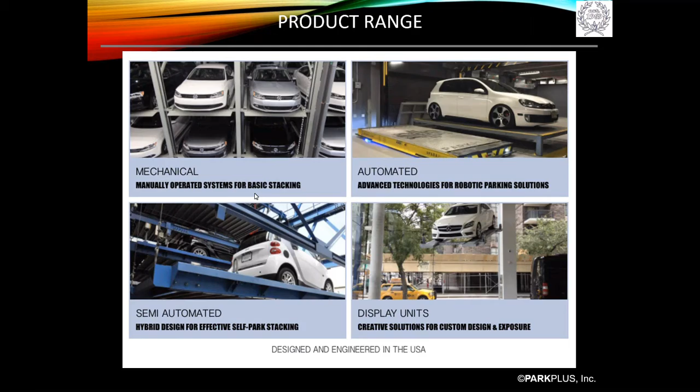So again, real quick, we're going to start getting into the systems. As I mentioned, the systems are going to go from the valet, non-intelligent systems, and as we keep moving forward, it's going to keep getting smarter, more dense, and more user-friendly.

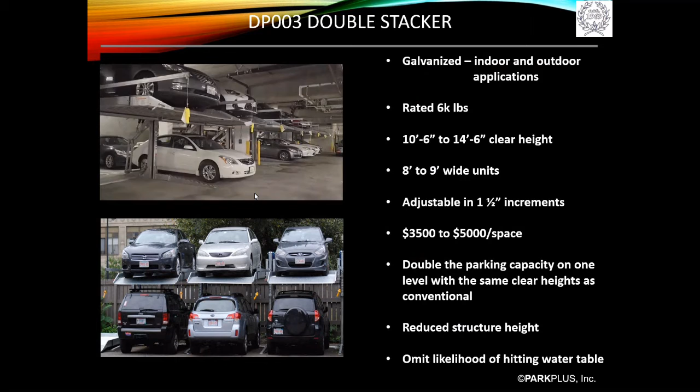So what's being illustrated here is just a stacker. Push a button, it goes up; push a button, it goes down. A very non-intelligent, valet-oriented system, because you have to physically and manually remove the lower level car to capture the upper level car—hence the valet. So you get a one-to-one solution: for every surface space, you get one space above.

This is a hydraulic-driven system. The 8 to 9 foot wide units, 10 foot 6 to 14 foot 6 clear height, rated at 6,000 pounds. Like most, actually all, of our systems are rated at 6,000 pounds.

The convenience of this system is pretty much a shelf item. We stock it, so we have it most of the time readily available. Very low price point, $3,500 to $5,000 per space. So in the picture at the bottom with the 6 spaces, you can say 3,500 times 6 up to 5,000 times 6, and economy of scale very much has an impact on our per space or per unit values.

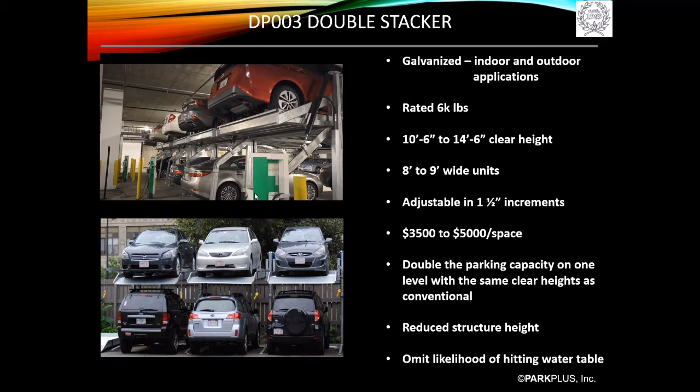The more spaces you do, the lower the incremental per space value is, and the reason is purely economy of scale. It'll take us as much energy to install, design, and get approved through local AHJs like permitting, planning, zoning for 20 spaces as it would for 200 spaces. So that's a case-by-case analysis on price points.

Typically this system, we'll see in the next few systems. This is illustrating a 3-level. These systems we see indoor and outdoor. They are hydraulic systems, so they're very much value engineered to be installed indoor or outdoor. So again, it's a case-by-case, project-by-project analysis.

Here again, you have to manually remove the lower level car to get the car on level 2 and/or level 3, and like on the next one, the 4-level, to get to the 4th level. So again, valet oriented. You have to have attendants, or we strongly recommend attendants for these types of solutions. You're pressing a button to go up, pressing a button to go down.

Very, very easy to operate, very easy to install. We typically have about a 5 to 6 month lead time on these products because the 3 and 4 level is engineered site specific. They are seismically rated if needed. We have ASTM steel if spec'd. So something that, in my opinion, is a differentiator in the market is the different add-ons we can offer to our systems, such as seismically rated, ASTM. We can paint, they come galvanized.

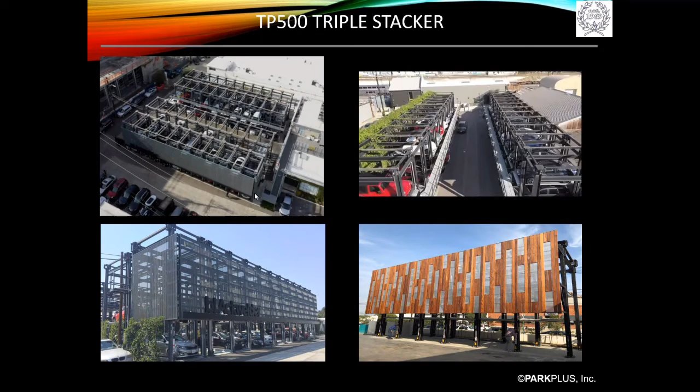This system here has a height of 21 to 26 feet for the 3 level, again hydraulic driven systems. If you notice the property top left, I like to illustrate that. It's actually a 9,350 square foot footprint. We were able to go vertical, 3 levels, and capture 132 spaces. So if you do the math, it's 9,350 divided by 132, that's 71 square feet per space. That gets back to that 86% space savings I was mentioning earlier.

So moving on, and again, if I glaze over something, if you want more detail on any of the solutions, or maybe you didn't hear me properly, just please stop me and ask a lot of questions. I don't mind at all.

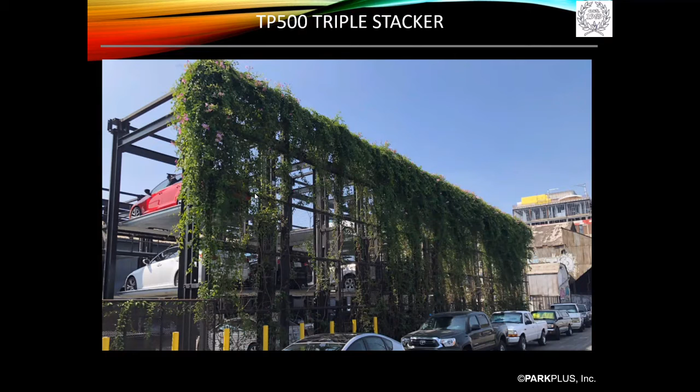Showing skin cladding roof, you can have our superstructure, our steel elements, double as your superstructure and simply hang, secure, weld, pin, or anchor a skin cladding roof to it. What we're finding in some municipalities, like Boston and Miami, is they don't want to see a structural steel skeleton sitting out in the community, so they're requiring a skin clad roof in some areas. It just depends on the local AHJs.

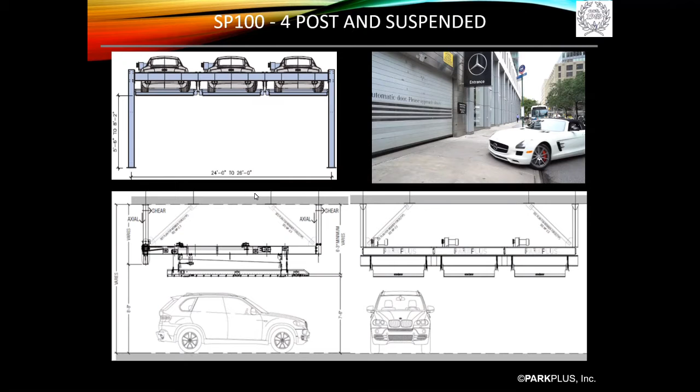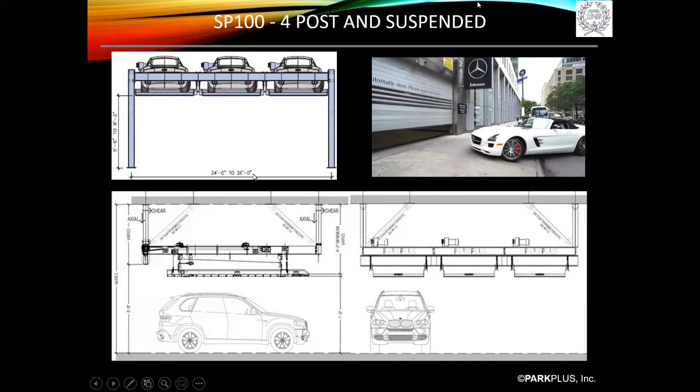Top left, what you're seeing is a 4-post solution. Prior to this, the 3 and 4 level, if you remember, you had a vertical element at each and every bay. Here we're clear spanning, so now the human element, or the idiot factor, is removed, and you're not backing in or pulling into structural elements at every bay. It does give a little bit of ease of operation.

So 4 posts on the top left illustration. The bottom illustration, what you're actually looking at there are 3 spaces. The section view in the PowerPoint, that's actually 3 spaces over the drive aisle.

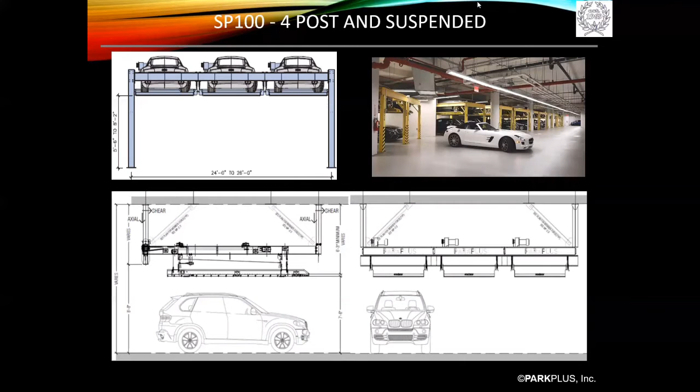So now what was once useless or wasted space over the drive aisle, you can have a lofted space suspended from the slab above, or even do it as a 4-post over the drive aisle and integrate spaces. You can do 2, maybe even 3 spaces, depending on the width of the drive aisle. So now you're talking about every 20 feet, getting an additional 2 to 3 cars in the drive aisle.

So the right shows one section view, and then the left illustration is another section view looking at a different angle. So it's suspended from the slab above.

With this illustration, you could actually omit these vertical legs. We could tie our horizontal primary member into your superstructure. So if we're well out ahead of the design, we could take that horizontal member, tie into a beam pocket, an embed, some type of moment-to-moment connection in your vertical columns, shear walls, cores, or interior foundation walls, and omit any vertical legs, whether running to the embeds above or even anchoring to the slab below.

And all you have now is a horizontal primary member. So it gives a little bit of a sleeker, more aesthetically pleasing look by omitting those verticals. So 3 different ways we can install that system.

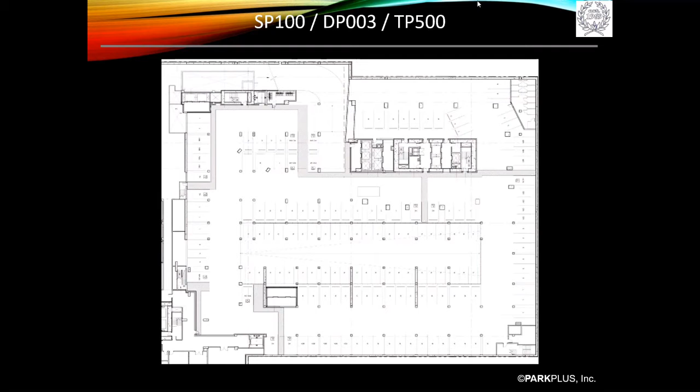What you're looking at here is plan view. So you guys are probably pretty familiar with this, looking at a conventional parking structure, plan view. Your columns are typically every 3 spaces. This was a -3, so this was 3 levels below grade.

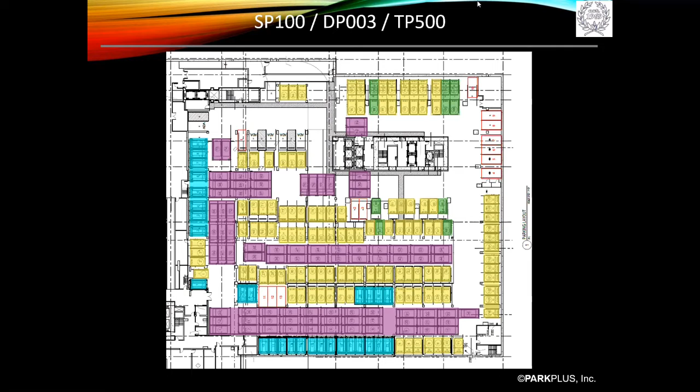So we got 446 spaces, omitted 2 levels of subterranean parking, which I'm not even sure how to put a value on, but at the end of the day, we omitted or reduced excavation by 9.5 feet. And that was our target, to rid the developer of excavation because it was wickedly cost prohibitive.

So here we're moving into our lift-slide. This is our semi-automated solution. Now we're moving away from valets—you do not need valets in attendance with this solution. You have the ability as a user to remote summon your own vehicle, capture your own vehicle. So it gives the user independent access, in other words.

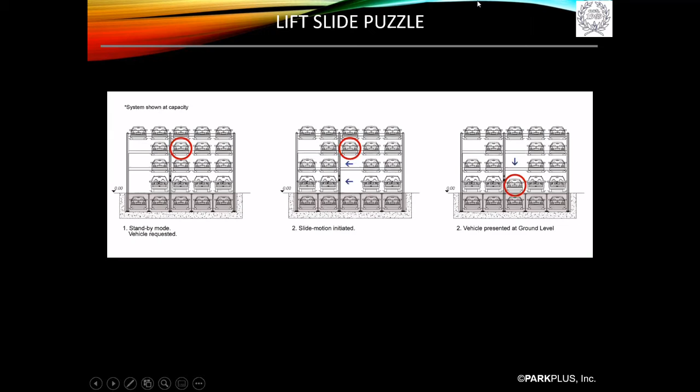This is going to show a video. If anything springs to mind, jump in, guys. This is going to really illustrate the user ability, or the user friendliness, of the system.

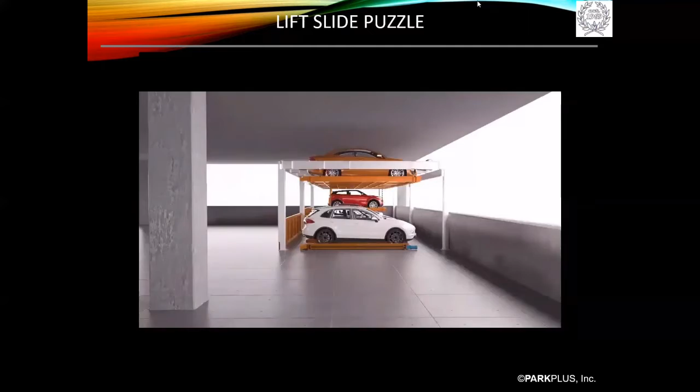Clear height: this system you can design anywhere from 2 to 15 levels. You can estimate 6 feet per level. So what you're looking at is a 2-level system. This would be in 12-foot clear.

You would get a sedan on bottom. You'd get SUV on bottom, sedan on top. If you gave us 14.2, you get SUV, SUV on second, SUV on ground.

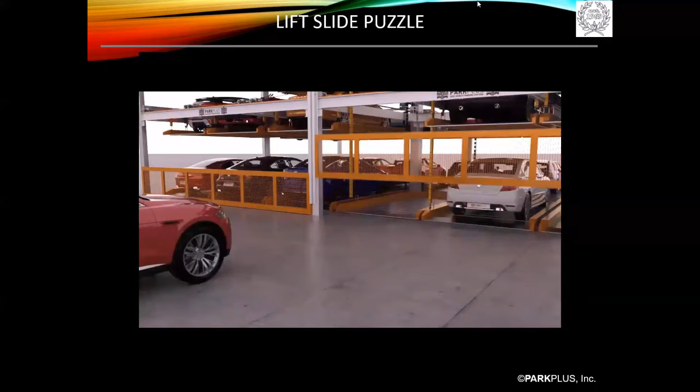Notice we're illustrating our modules. Every 3 bays you have a vertical element. The reason we show 3 bays having vertical elements, which this may resonate with you guys, is in superstructures your conventional footprint has vertical elements every 3 bays, 26 to 28 feet. Hence the reason we show vertical elements 26 to 28 feet.

Sorry, something stopped. So in short: 2 levels, 12 feet. 18 feet, 3 levels. 24 feet, 4 levels, and so on. So that's a good estimate, or way to budget.

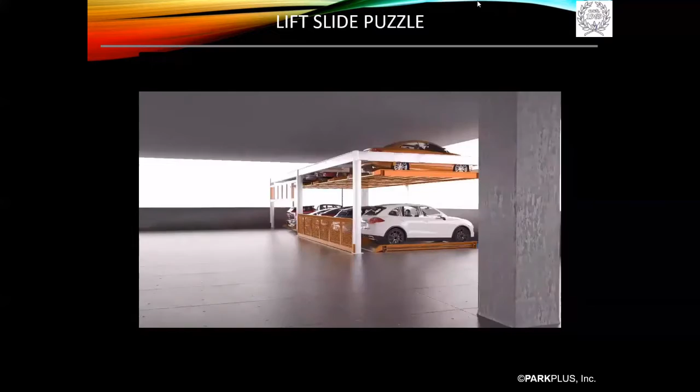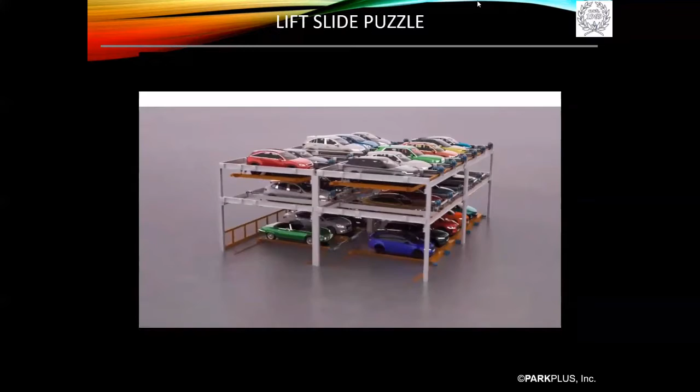If you've got a footprint you're looking at and clear heights you're looking at, that's a good way to do the quick math and figure out how many spaces, or how many levels, you can get in a certain clear height. And we strongly suggest, if you're weighing a project, or just don't have a solution, or you're trying to put as many spaces as you can in a parking vault and having challenges, we strongly encourage you to utilize us and our resources, our depth, and our history of experience. Send it to us, and we'll do a free first pass design and send you back what we were able to capture.

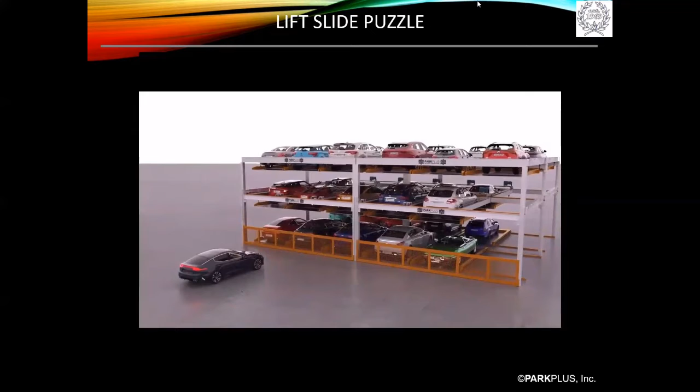9 out of every 10 projects we look at, we have value. There's a one-off every now and again where we just don't have a fit, but it's very rare. We have seen where we're lowering overall build cost, lowering structure height, or omitting subterranean parking, giving back layers of parking to convert into some other higher value use. So there's a tremendous amount of, like I mentioned at the very beginning of the PowerPoint, a lot of ancillary value.

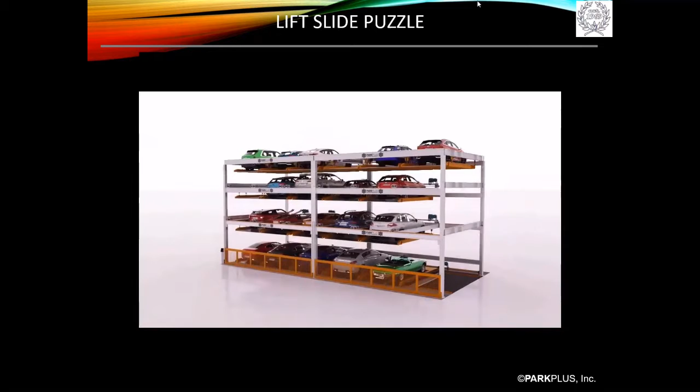This is illustrating a tandem, so what it is, it's 2 modules back to back, nose to tail. This is 3 levels. It's 6 bays wide, and now you're looking at a 6 bay wide, 4 high, 1 deep. This would be roughly 24 foot to 26 foot above grade. And then the pit, you're anywhere from 6'10" in pit depth to upwards of 8'2" depth in the pit, depending on whether we're accommodating compact sedan or SUV vehicles.

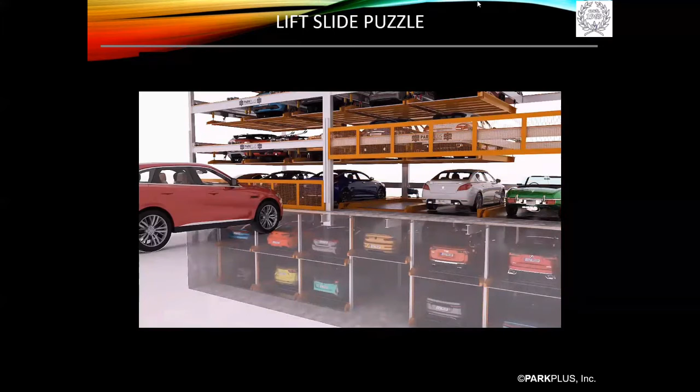The user friendliness with this is: from 150 feet away, you press a key fob. That's going to remote summon the module to activate. So by the time you drive that 150 feet, the system has already maneuvered and either brought your car down to ground level, or up to ground level from the pit, where you can capture your vehicle, and or brought your pallet down or up to ground level where you can park and deposit your vehicle. So you do have the ability for remote summoning.

You can have, there's a kiosk station, a user interface on each module, where you can simply enter a code and or wave your key fob, and again it'll activate the system. Any questions thus far? So again, this is the semi-automated non-valet system.

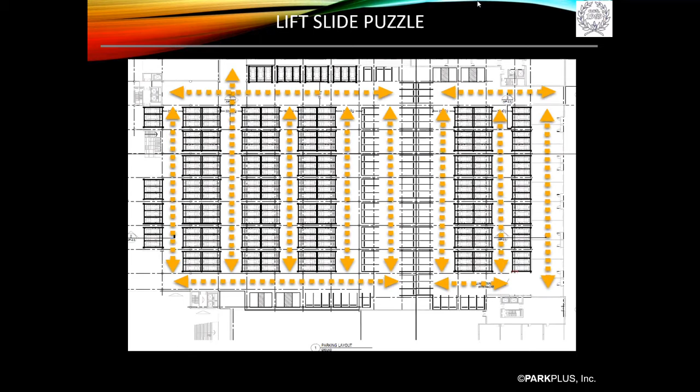The orange arrows are your drive aisles. So every 20 to 24 feet, you have a drive aisle where the user is navigating their vehicle either east to west in plan, or north to south in plan here, and then parking their car on a semi-automated lift slide puzzle system on either side of the drive aisle. Again, we can design and install these anywhere from 2 to 15 levels.

2-level system: 12 feet to 14 and a half. 3-level system: 18 to 21 and a half. A +5, -2 would be 30 to 33 feet in clear height, and anywhere from, for a -2, 14.2 to 16.8 in the pit.

EV capabilities. We do have the luxury of having EV, with Teslas being very prominent in the marketplace. We're seeing on a national scale an acceleration of EV spaces, and not only conventional, but due to local codes and ordinances, we have the ability to integrate EV charge stations in our modules for every single one of our systems and solutions.

We have 2 different packages of EV. One is individual charge stations for each space, so if you have 20 spaces, 20 stations. We also have the luxury of doing load balancing. In that scenario with 20 stations, that means you have 20 60-amp meters feeding those charge stations. Load balancing shrinks those 20 down to 5 charge stations, 5 meters, feeding 4 cars per station, so every CyberSwitching load balancing station feeds a 60-amp service to 4 vehicles.

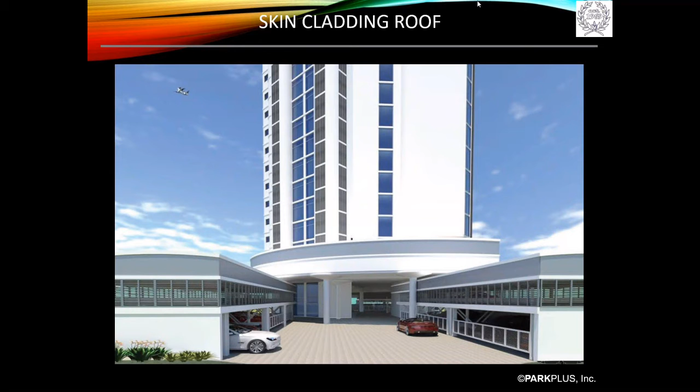So again, we've outlined the valet systems, which are your 2, 3, 4-level stackers and your lofted space over the drive aisle. We moved into the non-valet systems, which are semi-automated. Now we're moving into fully automated solutions, which is really seeing a dramatic push in the U.S. The scales are tipping toward fully automated systems because of the density we can capture with our rack and rail and AGV systems.

Autonomous vehicle control - we have a project in California that is by far 10 to 12 years ahead of the global market, where now you pull into a parking vault, deposit your car as a user, and walk away.

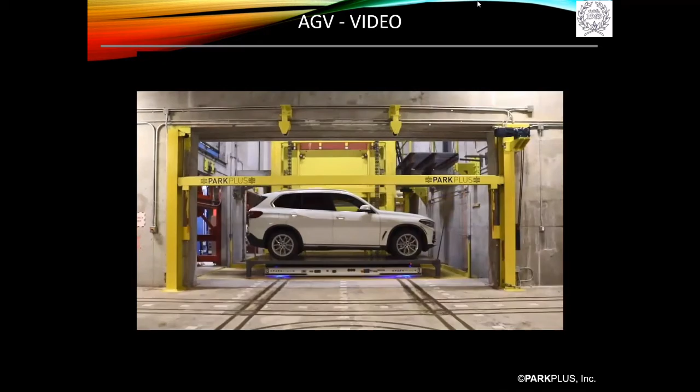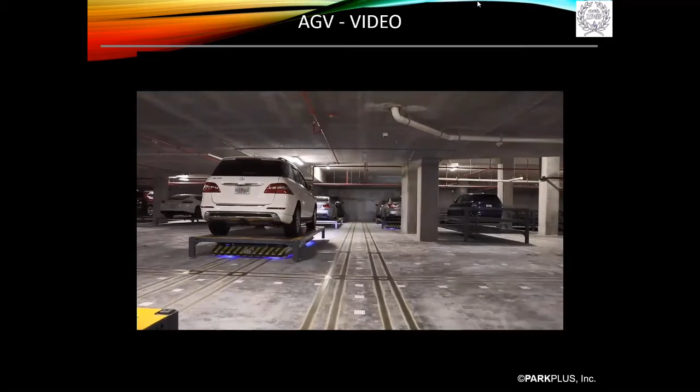The car is now autonomously controlled and navigated into our fully automated solution. There's a handshake between the two technologies, the autonomous vehicle control and our fully automated system, and then we deposit the car with our fully automated system anywhere in the parking vault. So very high-end luxury, touchless in particular because of COVID, which everybody seems to be on a drive to eliminate valets and go more touchless. Again, it's autonomous vehicle control, guys.

That's 10 years ahead of the market. So we're very proud. That's going to roll out late 2021. We expect a mid-2022 completion and turnover of that project.

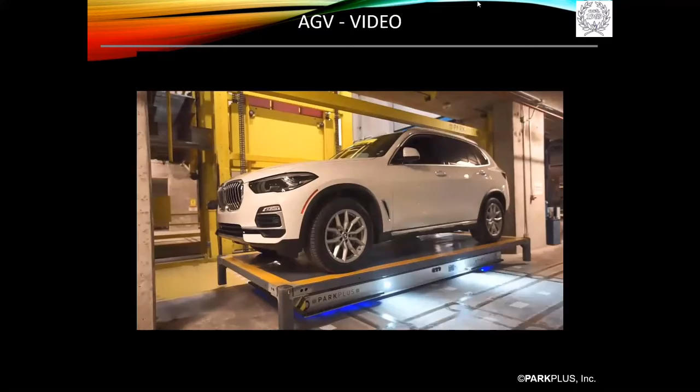This is AGV, automated guided vehicle. This is a robotic solution. So what you're seeing is a robotic AGV sled highlighted there with the blue LEDs. It picks up a tray, which in return picks up your vehicle, and then it'll manipulate your vehicle and tray anywhere on the dance floor it wants to. It's very omnidirectional. It can move in any direction, traverse in any direction, spin in any type of radius, and maneuver itself into tight spots or around superstructure elements, for example.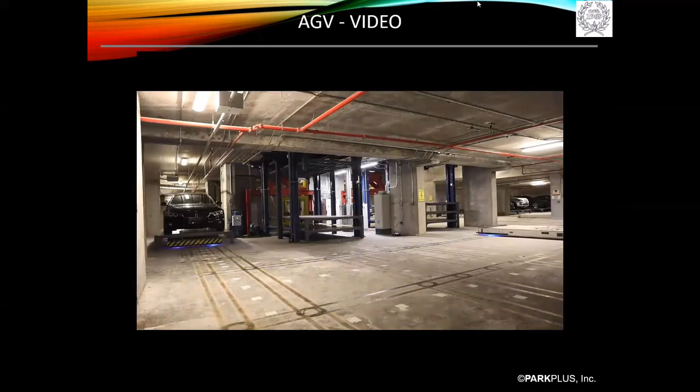Notice here we're within inches of tolerance around superstructure elements and even adjacent vehicles. We're literally putting cars side by side and on top of one another with this type of solution. We're getting down to as little as 160 to 180 square feet per space. To put that in perspective, conventional above grade parking is 350 square feet per space, and below grade conventional parking is 450 square feet per space. So as a reminder, we're 160 to 180 square feet per space - that's half to two-thirds the footprint you find with conventional parking. Hence the value add and the acceleration we're seeing with this product in the U.S. market.

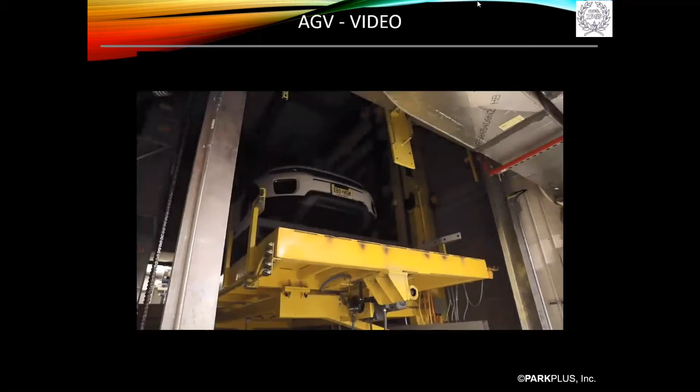This is another project. The one you just saw, the AGV, was in South Florida. This is in New York - Zaha Hadid's building on 28th Street. We've got several projects with Zaha Hadid properties. So what you're doing as a user is pulling into a loading bay with these solutions. You're getting out of your vehicle, taking your keys, locking your vehicle, and exiting the loading bay. The bay door shuts behind you, and you walk and do what you need to do for the rest of the day, whether going to retail, mixed use, restaurant, or even to your unit.

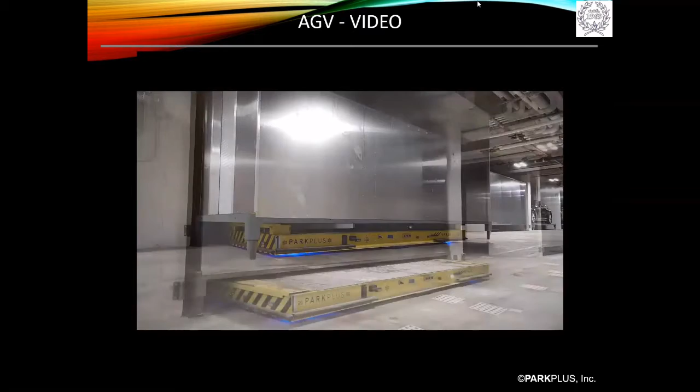And your car is being whisked away at the same time. So we can actually manage a higher volume of throughput. Instead of winding up or winding down this labyrinth of a garage, you're pulling into a loading bay - 10 seconds later, you're done. Now your car is being whisked away and parked into the parking vault.

What you're looking at now is we've actually converted our trays into storage pods. Again, this is Zaha Hadid's project, where if you want to retrieve a storage pod where you have a large closet, you have the luxury to remote summon the storage pod, capture or deposit any number of items from your storage pod. This is a very omnidirectional type of product. If you've got odd footprints, or you're trying to capture a wicked amount of density more than typical, this is a great solution for that.

I show this from that same video for a few reasons. One, this is not your typical OEM, or original equipment manufacturer, vehicle. It's a Jeep - huge tires, higher vehicle, not typical. We're able to accommodate non-OEM vehicles by having height, length, and width sensors in the loading bay. So as a user, when you pull into the loading bay, your car is being identified - can it fit into the system? It's as simple as a red light, green light. Green light, you're a go, you fit. Red light, you don't fit.

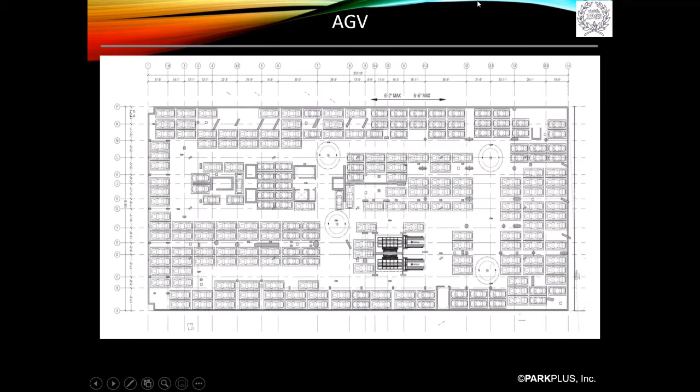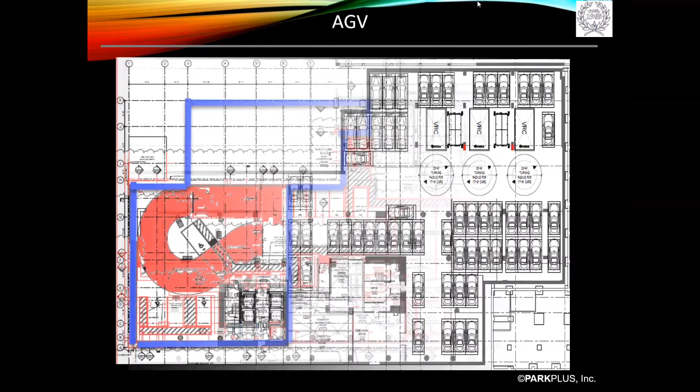We gave back 38,000 square feet, which he turned into retail on ground, amenities in the cellar, and a gym, which is what he was driving. So we met the target. 38,000 square feet translated into $12.375 million for our solution, which cost $5.5 million. So we were able to capture roughly $7 million in less than a week that we were able to give back to the developer.

We omitted 1 whole level of excavation, and again, I don't even know how to put a value on that. So we gave back $12.3 million - well, the delta between 12.375 and our $5.5 million, so roughly $7 million plus omitting the excavation. So maybe $10 million is what we gave back in just 1 week of design efforts.

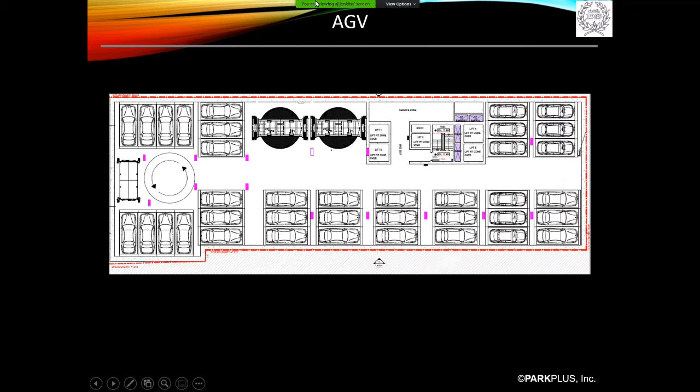Here we're showing 3 deep in tandem, north and south in plan. This is just showing you a couple of different design iterations that we can offer. Here we're showing north and south in plan - we're showing north to south configuration, while the rest of the parking vault is east to west. We do have the luxury being a very omnidirectional system and being able to remote maneuver in between all of these superstructure elements to capture vehicles. So we can design a tremendous amount of density with this particular solution. EV capabilities, like I mentioned earlier, we do have the luxury for EV with every single system.

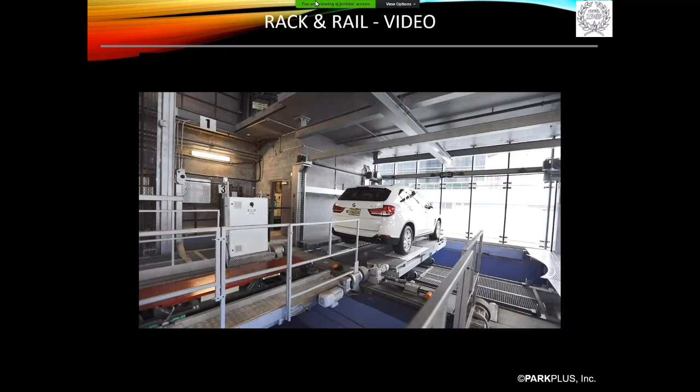Now, and I know we're kind of pressed for time, we're running into our rack and rail, also a fully automated solution. That's the building, a pencil building. It's a 9,000 square foot footprint. They needed to capture 208 spaces in a 9,000 square foot footprint. This is on the coast in Miami, just north of Miami Beach - I'll think of the area, Aventura. And we were able to go vertical 26 levels, 4 spaces on either side of the elevator core.

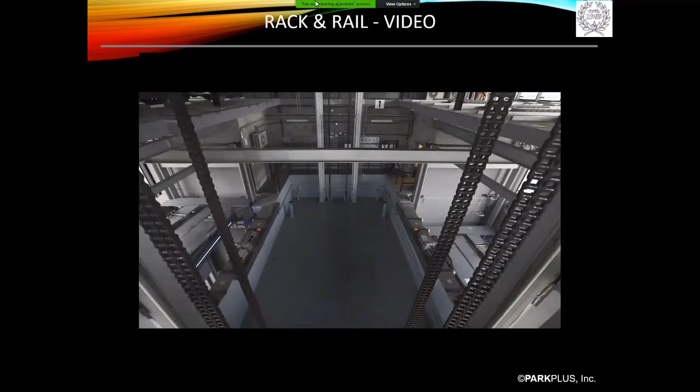Here you notice we're going straight vertical in an elevator core. We have 2 pallets going vertical, and 2 in the retrieval aisle that are going vertical and or capturing vehicles that are traversing on each level. Again, as a reminder, there's 4 spaces on either side. And as I mentioned earlier, we can go from ground to level 26 in 60 seconds, and from level 26 to ground in 60 seconds. Super efficient, very fast system.

The user has the ability to remote summon their car from a key fob like you see here, and or a smart app. So if you're sitting in your unit, you can remote summon your vehicle, and on the smart app, it starts counting down 42, 41, 40, 39 - you know you've got 39 seconds to capture your vehicle. A very intelligent system. The AGV is more robotic - this is a little bit more mechanical. Both solutions have their place. It's horses for courses.

Depending on the dimensional footprint we're working with, the user experience, and the amount of density we're trying to design, each solution has its own appropriate fit. If you've got a big square or a big rectangle, which you typically find with parking structures, this is the right solution. Very economical, great price point.

What we help weigh with you is when we're looking at automated systems and we compress the footprint—let's be conservative and say we compress it to half—our system may cost $30, $40, $45,000 per space. But what we look at is what did we give you back, or what did you gain by reducing that parking footprint, and what's the delta between our cost and what we gave you back. Nine times out of ten, it always pencils out in the client's favor. So it's something we help evaluate with each of our clients, whether architect or developer.

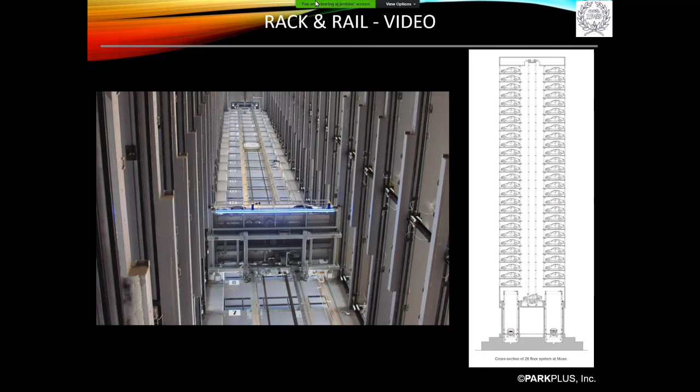What you're looking at here, the illustration on the left, is from ground straight up the elevator shaft. On the far right is a section view showing the two loading bays on either side of the property, lifted vertical, traversing into the center core, then going vertical for 26 levels. That particular project was 26 levels, but it was an exoskeleton to the superstructure—it stands out in front of the condo units.

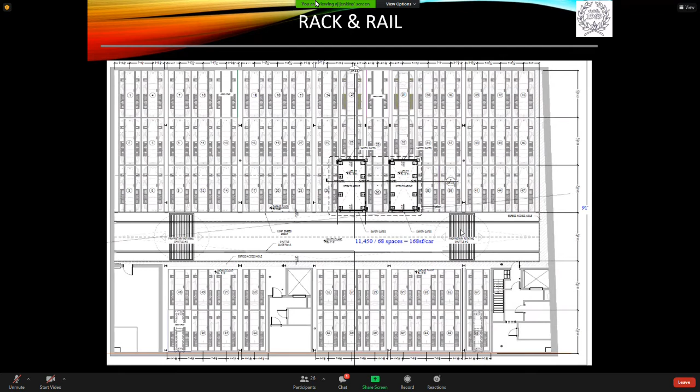Here's a project we finished in Boston. I love this one in that we were able to shrink the parking footprint to 168 square feet per space, if you notice right there in the center of the page. So what you have are three spaces north, two spaces south, traversing pallets left in plan, traversing pallets right in plan, either depositing or capturing vehicles. These cars are all traversing in the aisle.

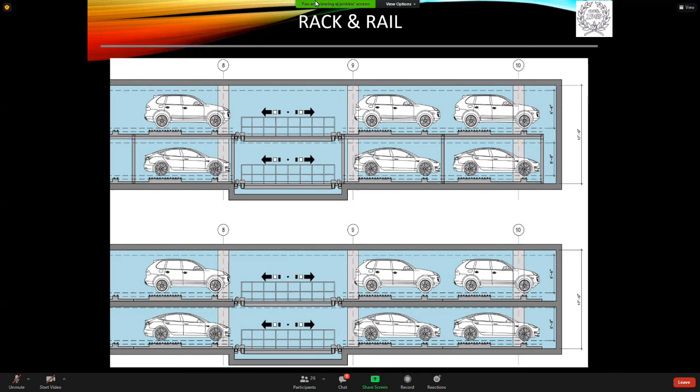This is illustrating the clear heights—I think we're roughly 17 feet in the ground with this particular project. This is showing skin, cladding, and roof. You could do standalone structures as well.

To bring it to a close, we do have CCTV availability, which you can find in most of our three corporate offices—CCTV capabilities where we can get a live feed into your property so that we can mitigate any user experience problems. We also have the ability, in most of our major metropolitan areas, to look on our iPhone or even our laptop and see the system in operation.

So we can remote in to your property and self-diagnose from 2,000 miles, 200 miles, even 2 miles away, or 200 feet away. We have the luxury to mitigate very quickly if there are any impacts to the efficiencies of the system, which segues into the tremendous amount of redundancy built in and value-engineered into these systems—there are backups on backups. So we run very high uptime when looking at our systems, the highest in the industry of uptime versus downtime. Most of the downtime we see is because of user experience or user error.

But again, we have the capabilities to mitigate that with CCTV, remote capabilities from our phones or laptops to see the system maneuverability. And it's very AI, artificial intelligence - it can identify users that are using their vehicles every day versus those that capture their vehicles on weekends.

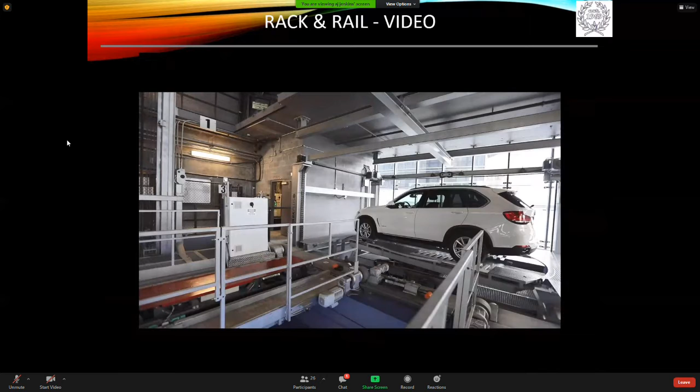Right, yeah, it's economy of scale. I mentioned earlier, it's economy of scale. If we did 20 spaces, honestly, full disclosure, it's a high value because it's only 20 spaces, and it takes us so many resources internally and so much effort to do 20 spaces as much as it does 200 spaces. But I've seen pricing anywhere from $24,000 a space for these systems, I've seen it as much as $80,000 per space. But the $80,000 is for like a 6-space project. I've seen $24,000 a space for 600 plus spaces.

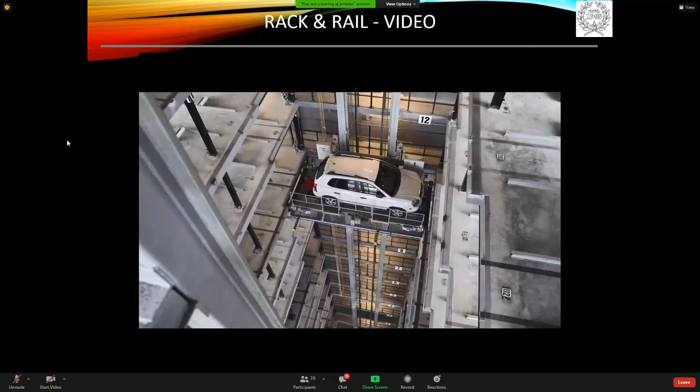So it's a little bit of a moving target, and I apologize, but it is a case by case analysis. I would use, for budgeting purposes, a $30,000 to $40,000 evaluation for most of your high volume type parking projects, 200 to 300 plus spaces. If you get down into 70, 80, or less than 100 spaces, I would creep that up to maybe around 40 to 60 per space, depending on the design, whether this is the 2021 contract, a 2022 contract, 2023 contract, and when it builds.

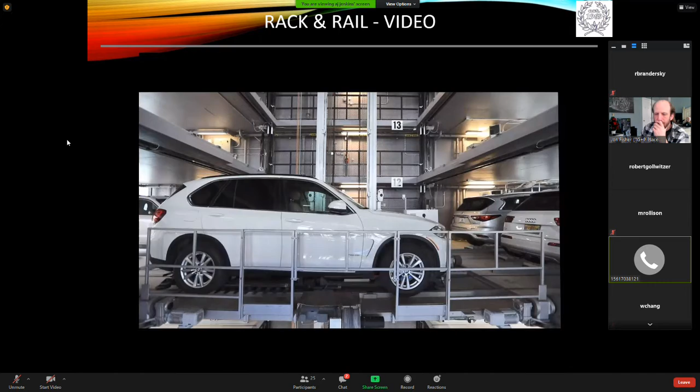If this builds in 2023, well, we got to bring out our crystal ball and figure out where our pricing is going to be. So a couple of different influencers, and also where we're building. Sometimes with local AHJs, we get engaged in a tremendous amount of processes that can sometimes take us a year to get approvals, so we have to build that cost and bake it into our contract value to cover internal resources.

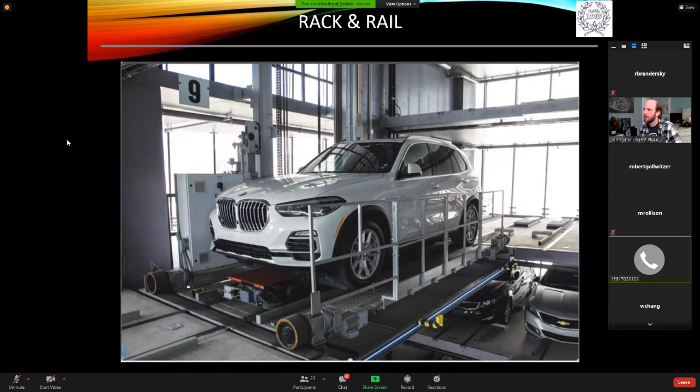And it depends on whether the system has been introduced in that particular market. In Boston, at the very beginning, it would take us 6, 7, 8 months to get through the processes with local AHJs. Now it takes us a month, but that's because they've seen the systems now - they understand the remote capabilities, user experiences, the fail and fall safes, and the amount of redundancy built into the system. So the region we're designing and building in has an influence on some of the pricing models.

And a lot of the work that we do is residential. Generally not a condominium, but more like just market rate housing. And yeah, we do work in some places where this comes up, usually more urban.

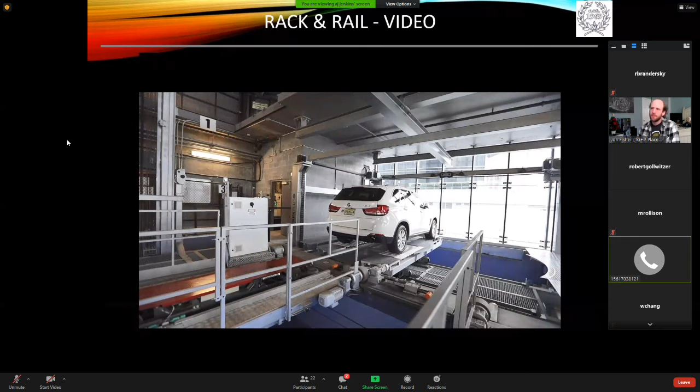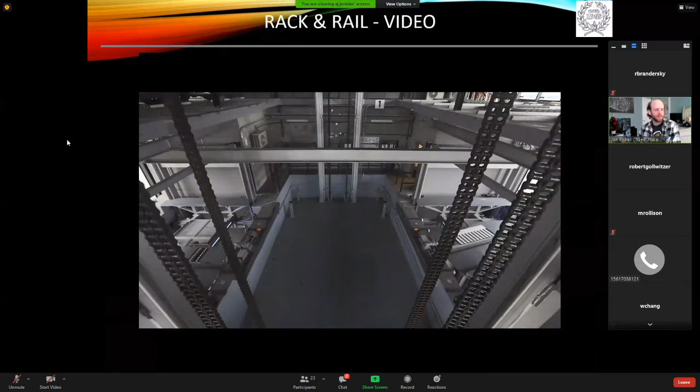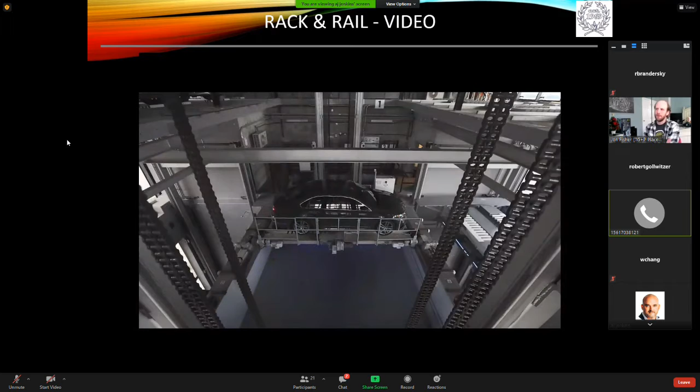When we do a residential project, do you get pushback from leasing people who say, how do I know that I'm going to have enough parking for other types of parkers, like people who aren't going to accept their car going into these systems? Do you have ways to make sure there are convenient surface spaces as part of your layout?

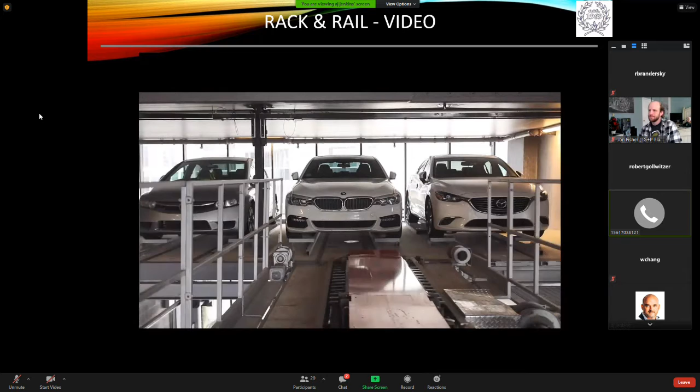We do. To give you some insight, we can park Range Rover Sports, Jeep Grand Cherokees, Ford Explorers, Tahoes, and Suburbans even in these systems. What we can't park are Hummers, dualies, and crew cab trucks. Not to say we can't design or engineer for them, but by the time you pay us for the customization to fit those types of vehicles, it doesn't usually pencil out as well.

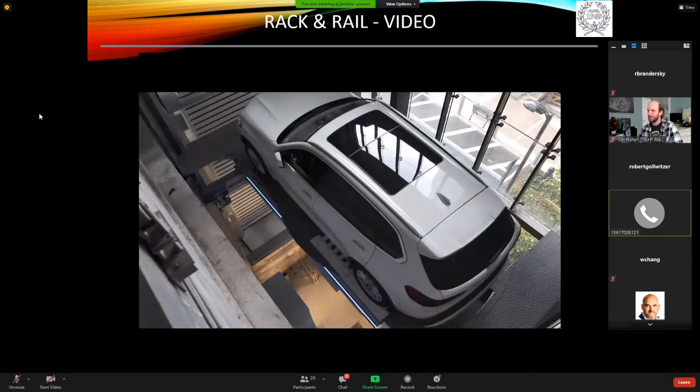With that said, we did design a solution in Texas, where everybody drives a truck or SUV. It penciled out for that particular property because they didn't have another solution—that property could not have gone vertical without our system. So we do recommend leaving a few conventional spaces at grade, or wherever, just for that unknown vehicle. Dualies, though, I don't ever see us being able to accommodate.

But with that said, we've designed and engineered our systems to park Amazon vans and ADA vans. These fully automated systems are ADA compliant. If we have to design one of our loading bays to be ADA compliant, we have that capability, and it'll deposit an ADA type vehicle in the parking vault. We just carve out a certain section or number of spaces for ADA type vehicles, whether they be taller, longer, or wider.

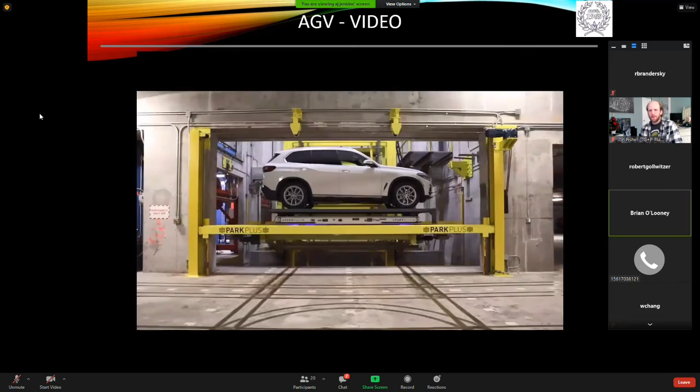That leads to a question I had about accessibility with trays, because historically your competitors would say that trays and side rails wouldn't meet code or tripping codes in some jurisdictions. Clearly the AGV and fully automated systems avoid that. So when you're doing a tray system, are you typically carving out accessible spaces in the front of the garage for those uses, with the non-accessible spaces in the rack?

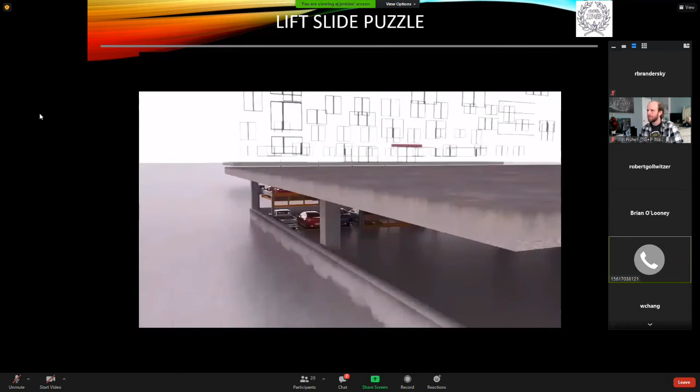Yes, that's this solution here, the semi-automated system. With the semi-automated solution, you're right—the tray has a perimeter edge, a 5-inch perimeter edge. So yes, with this solution, we always suggest having a conventional ADA space, or spaces, for that matter.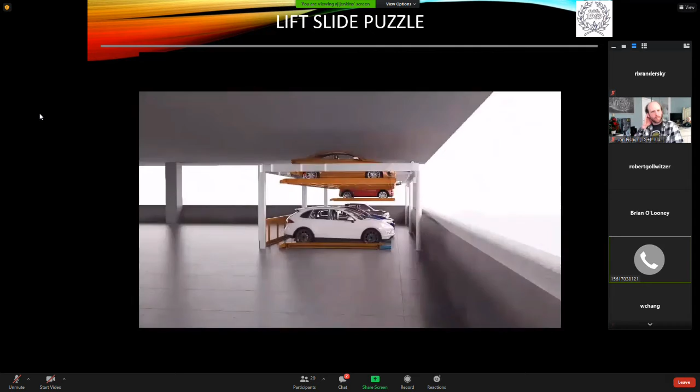We could design this to be ADA compliant, but again, you don't really want to, because it stretches the system in length, width, and height—and when you do that, it impacts the entire module. So in that one 3-space-wide module, if I made one space ADA compliant, it impacts that entire module, and sometimes it's not convenient due to clear heights and dimensional constraints.

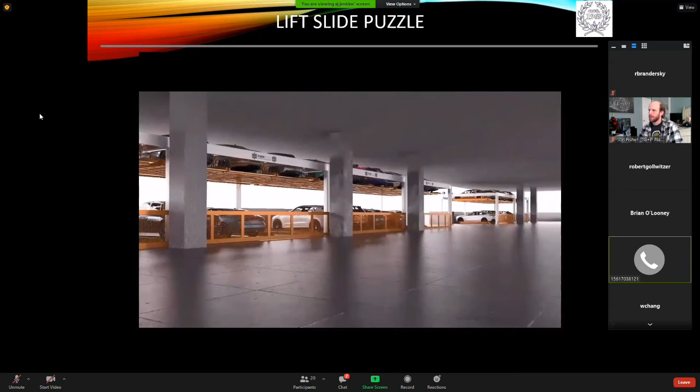So for this solution we always suggest leaving a few ADA spaces conventionally. The way you'd do it in the rack would be to have an extra-wide tray with a 3-foot aisle next to the car—basically a big tray. No, you don't have to with this solution.

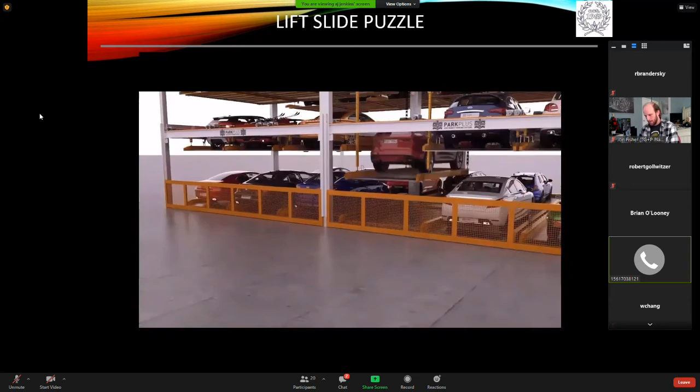We have the capability to design this from 7.5 to 9.5 feet wide, so as the user gets out, it's just like a conventional surface space. If you think about it, when you put two Tahoes beside one another, you can't swing your door like you typically can with a smaller vehicle beside you. It's no different here—you've got to be mindful of the door swing because of the other large vehicle beside you. The space is the same as your conventional space.

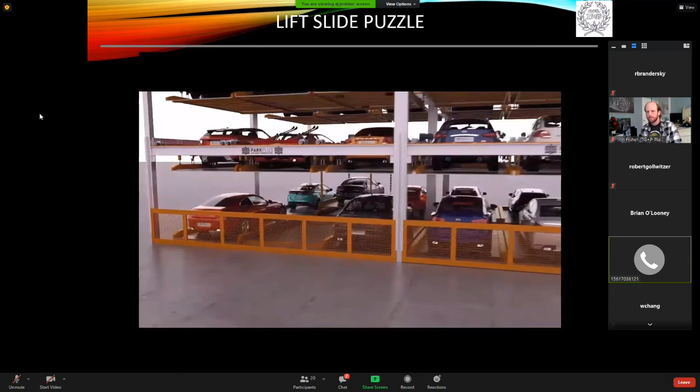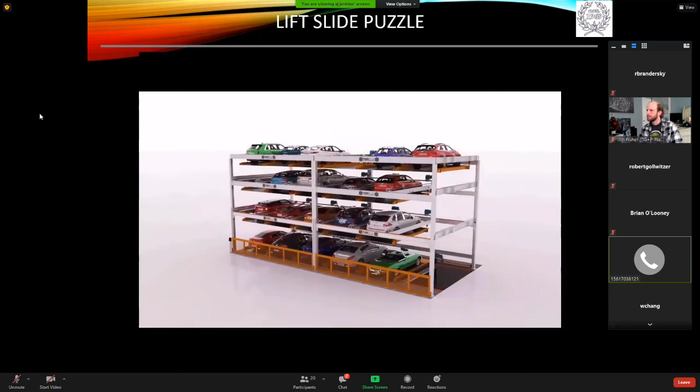Now if you've got two compacts, you have door swing and an aisle you can walk on in the tray, so it depends on the vehicle. A Tahoe, you're a little tight; a Jaguar XJ7, being slender, gives you more room. But again, we can design it 7.5 to 9.5 feet wide—most vehicles are less than 6 feet, or right around 6'2" or less wide.

Okay, a separate question on the AGV system: if we had a 300-car facility on one or two levels, where's the AGV coming in range-wise for a larger facility, just so we can get a better sense? Do you have an estimate on that yet?

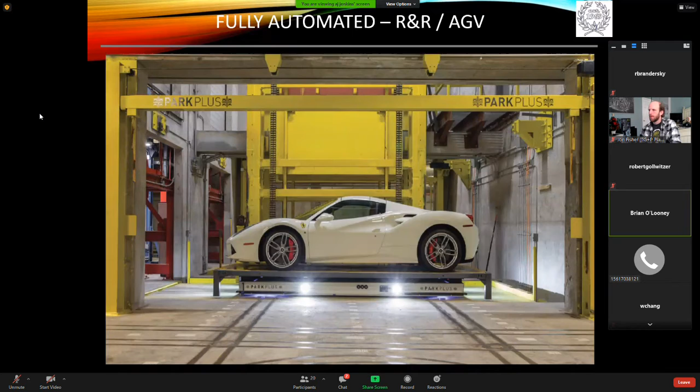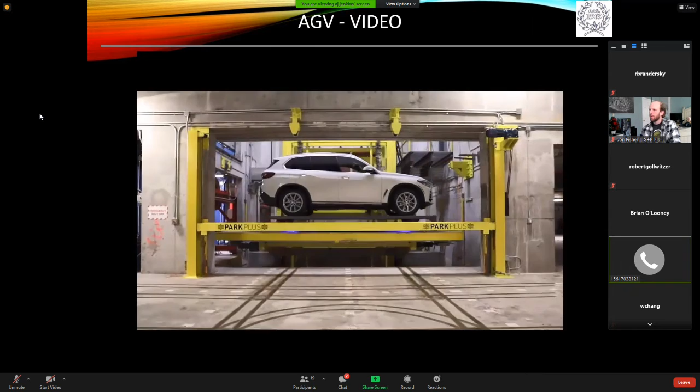Yeah, about that same price point. You're going to be somewhere between—how many spaces did you say, 300? So you'll be somewhere 30 to 40, somewhere in there. I hate that there's a $10,000 delta between the two, but if it's a 2021 contract design, early 2022 build, you're probably looking at 30 to 35. If it's projected out and you're not even through entitlements or permitting, it's going to be a 2023 build, and I've got to lean on the higher side of that value because I don't know where pricing is going to be at that time. But we can always do pricing based upon today with maybe a 3 to 5% escalator every year it's not built.

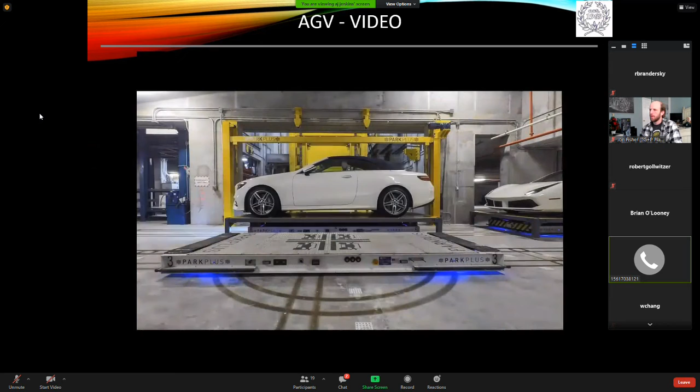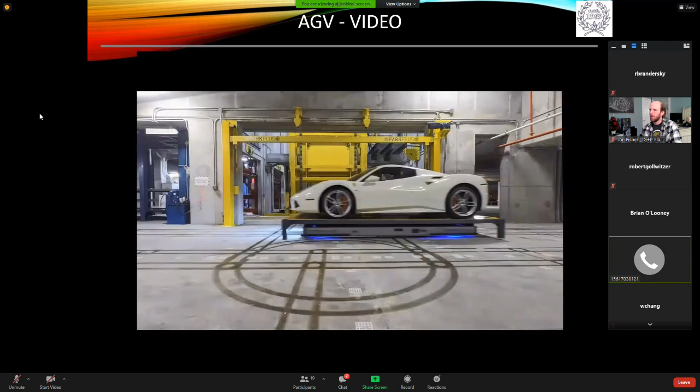So you could be at 30. I've seen as low as 24,000 a space to upwards for a typical design, typical footprint. 24 to 40 is typical.

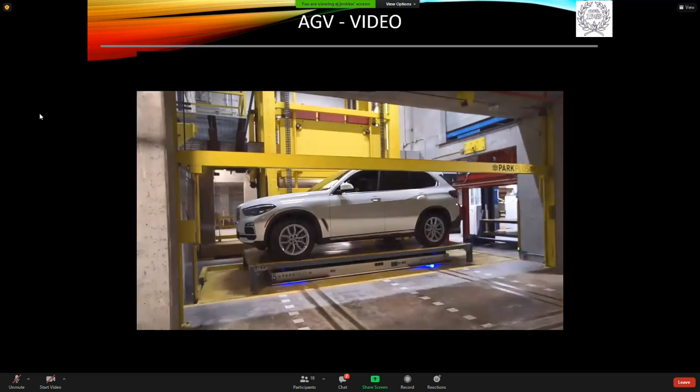When you get down into 10, 20, 30, 40 spaces, it absolutely creeps up in value. But what we have to look at is what did we give back or what did we omit? To give you a prime example, a project in Boston was 4 levels, a very slender building—the footprint was only 35 feet wide. So they had to get 4 levels of parking. It was impossible to get a row of parking and a ramp in 35 feet. So we were able to pull into a loading bay and go down into the cellar 4 levels, capturing 32 spaces in 4 levels below grade at 35 foot width. So again, we were able to give back.

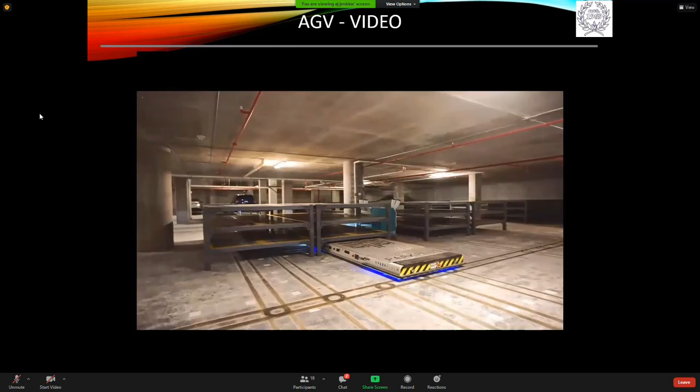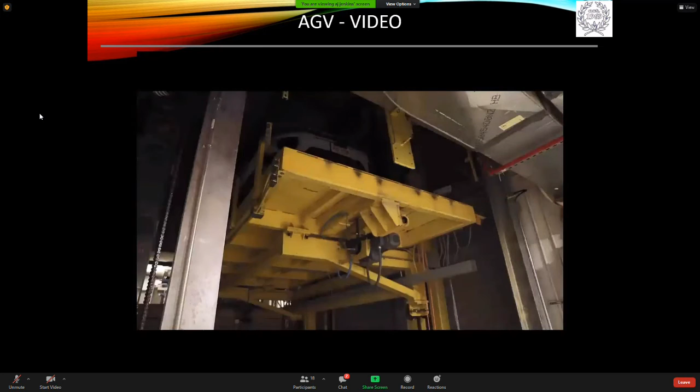We were able to give them a project that was dead—couldn't get entitled, couldn't get funded, couldn't get permitted because it couldn't meet the parking code requirement. It made it a go project, and that turned into a $165 million project. The one that was 26 levels is a $386 million project that was dead in the water—couldn't do anything because it was a postage stamp lot. So our system made happen a $386 million project.

That's a tremendous case study, not the stereotypical one, but it's one in our portfolio we're super proud of because it had a tremendous amount of value. We ended up—that was with JLL, Jones Lang LaSalle, I believe, if I'm not mistaken, and a developer out of South America.

We're doing projects with related groups—I'm going to drop a couple of names for recognition. We have a national account with the Related Group, happy to give you any contacts you want there. They're going to have nothing but praise for Park Plus. Any project nationally that Related does, we're going to be on it. We've now bid for that work 2 times. The first time we bid with competitive vendors. The second time, they didn't even put it out for bid—they just asked us to restructure our pricing. We restructured our pricing in their favor, gave it back to them, and now we're under contract for another 4 or 5 years.

Skanska, Turner, Arquitectonica—who else? I mentioned earlier, Zaha Hadid. Several major players in the marketplace that we're working with. We're working with—I don't know where it's going to go—JLL, also with Tishman Speyer. I don't know where those projects are going to go right now, but we're working with those guys.